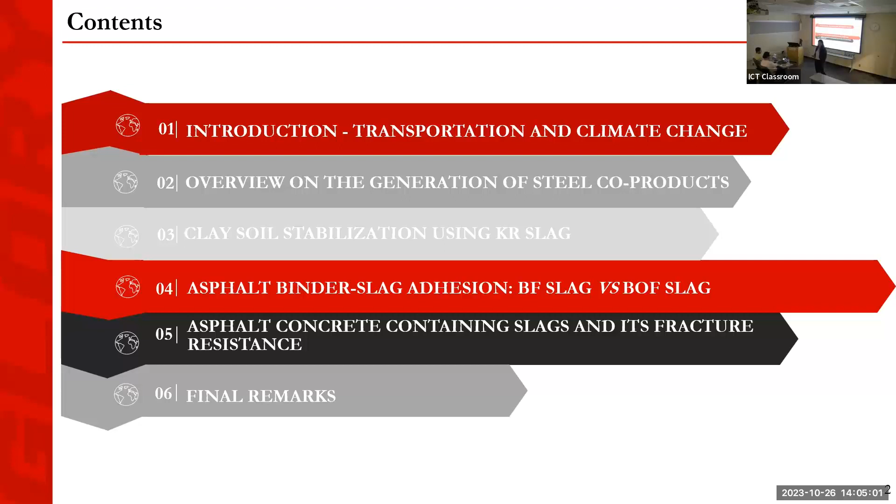And then the last case, I do work with numerical modeling, so I had to show a little bit of modeling and how I use it to try to infer if I use slag, how does it change the cracking evolution, initiation and evolution, and final fracture of an asphalt concrete, and final remarks.

So just to start, transportation and climate change. Probably you already heard in many presentations that there is a concern in many seminars, webinars, that we are talking about climate change. And there are many effects, and especially on transportation systems, we are seeing the effects of climate change with extreme events such as floods, droughts, hurricanes, wildfire.

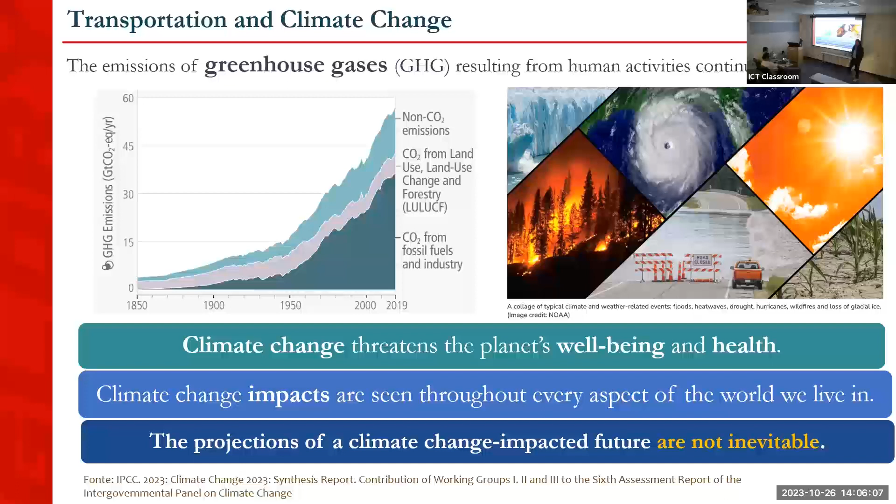And the cause, it's because we are increasing the amount of CO2 emissions, the way we are using the materials, and we are building infrastructure, we may be harming the planet. So the planet's well-being and health are threatened. So we need to find ways to minimize the impacts of our activities. So the projection of a climate change impact future is not inevitable. What I'm saying is that we can do something right now so that we have a better future for our planet at the end.

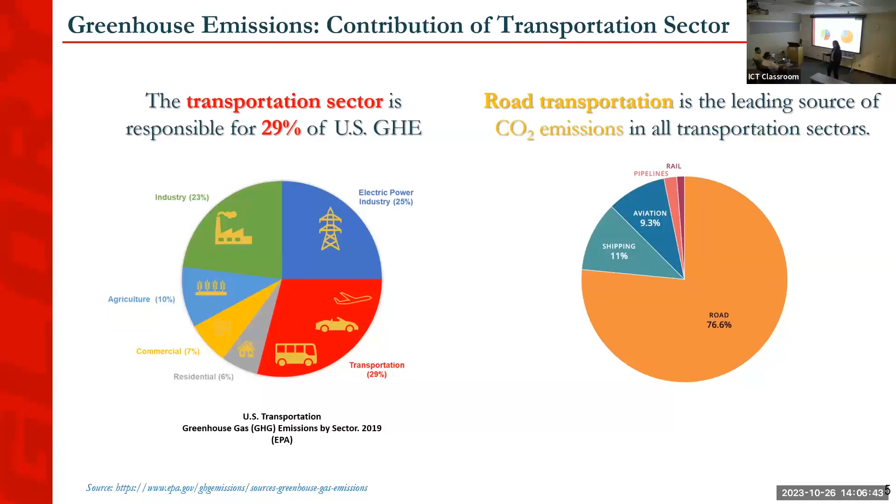So talking about the main contributions for CO2 emission, the transportation sector is responsible for 29% of the US greenhouse emissions, as you can see on this graph from EPA. And when we talk about transportation, we have contributions from aviation, shipping, pipelines, but most of the contributions come from roadway transportation, okay? And part of these impacts comes from the production of materials and roadway building and maintenance activities. So just for material production and transportation, road construction and maintenance, we can account for 5 to 25% of the total carbon emissions from transportation.

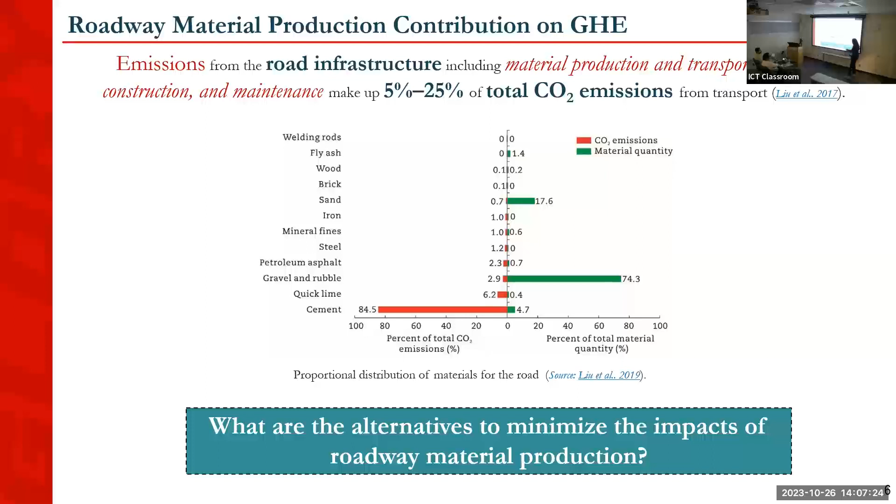So we need to find a way to try to reduce that number. That is our contribution as people that work with infrastructure materials. Maybe not as big as other contributions for other sectors, but we still have to make our contribution to try to reduce the CO2 emissions. Okay, so what are the alternatives to minimize the impacts of roadway material production?

So there are many ways that we can think as engineers, as materials engineers, to contribute to less CO2. One way, the way that I like and love to research, is by recycling and reusing materials that we already have available. So why extract new materials if there are local materials we can use? This helps minimize the extraction of natural resources. Second, using local material, we reduce the transport distance of the material, so less fuel consumption.

This also contributes to the reduction of CO2. Again, we get local materials that are locally available. We can mix, but it's not going to help if the interaction of this material is not good with conventional pavement materials. So we've got to also try to find ways to design and optimize the use of those materials so we can have durable mixtures, or pavement base layer materials, at the end. This all helps pavement sustainability.

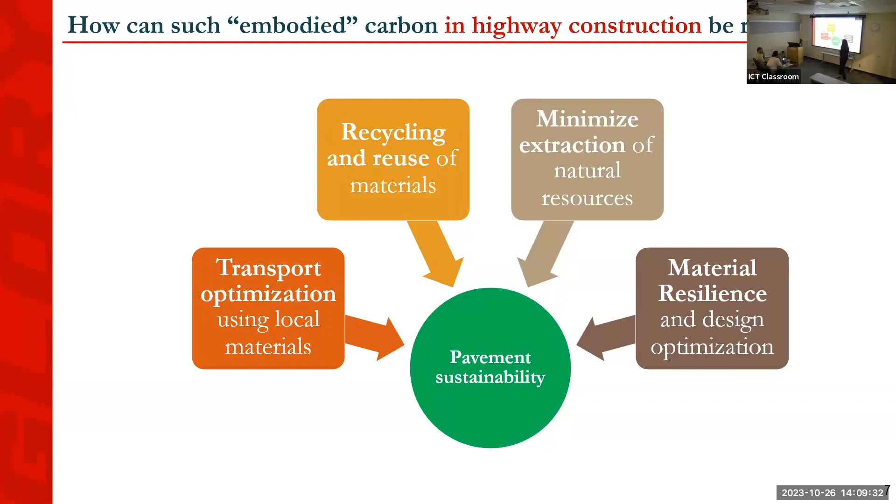And that's where slag comes into play. When I think about slag, if I have a slag company, a slag supplier close to my construction, I can recycle and reuse that material. I can reduce and optimize the transport of materials. I can use slag in place of natural aggregates, and minimize the extraction of natural resources. And because of some of the slag properties, I can enhance the performance of my mixture or soil. So I can see slag participating in a positive way in many of those things that can contribute to pavement sustainability. So let's go to slag then.

So what is slag? Slag comes from steel, and steel is one of the most used materials in the world, the second most widely utilized material globally. Global production of steel is 1.8 billion tons - it's a lot of material out there. In the US, 85 million tons are produced every year. So we're talking about steel.

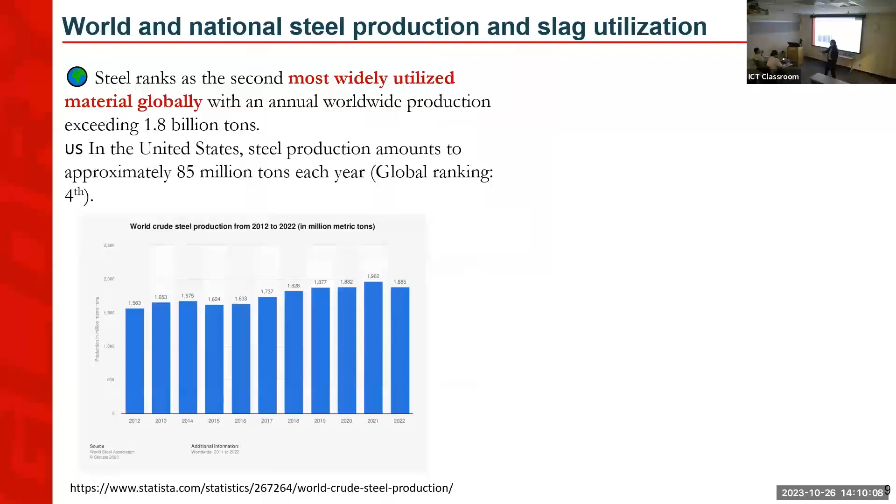But during the production of steel, we have the generation of this co-product. This seems like an aggregate pile, doesn't it? This is a recent photo that I took in Nebraska at a slag supplier. This material, when it comes from steel production, comes very hot, and then when it cools down, becomes like an aggregate. This is a great material, and I'm going to show you some of its properties.

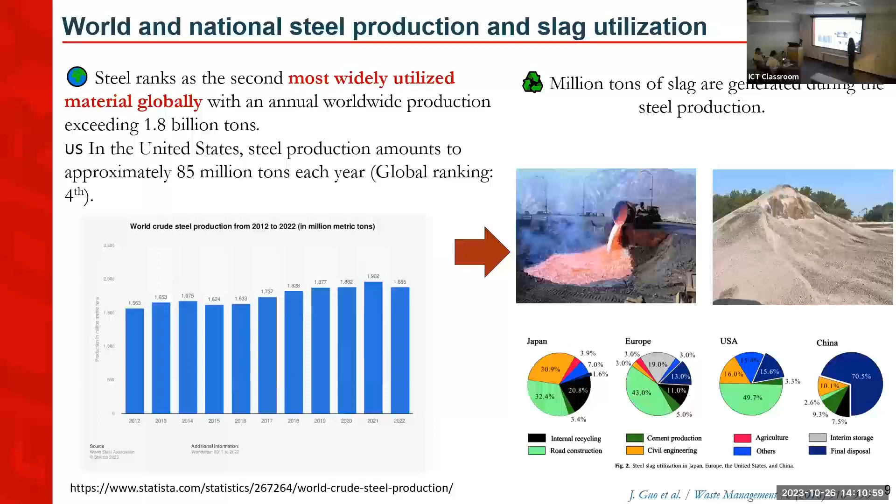And in fact, it has been used in many countries and continents. In the US, roadways use 49%, but you still have 15 to 16% that are just disposed of in landfills. Even in roadway construction it's used, but maybe we can have a better use on roadways. They are used, but just for local roadways or paving rural areas, but maybe we can use it for novel structures.

So what are these slags? You know slag comes from steel, it's a co-product. Let me show you that there are different types of slags. But before talking about slags, let me show you how steel is produced so you can understand where slag comes from. To produce steel, we need raw materials such as iron ore, limestone, and coal.

Those materials go to pre-processing, and then they come into this first furnace that is called a blast furnace. This is to transform the raw material into molten iron - this is the first thing we do to get to steel. We produce molten iron. Then, depending on the industry, they want to remove excess sulfur from the molten iron because this improves the quality of steel.

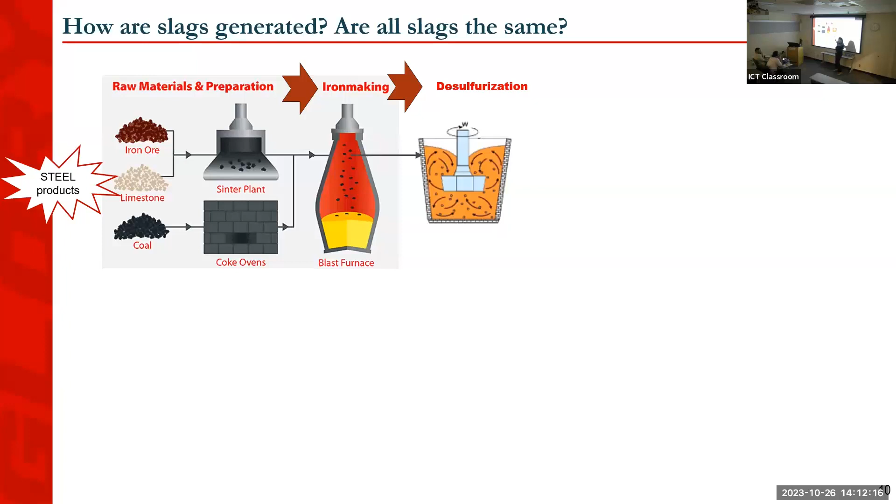So the molten iron goes to a desulfurization process, and this furnace is called a Kanbara reactor. So we remove excess sulfur from molten iron. Then the molten iron goes to another furnace - it can be a basic oxygen furnace, or an electric arc furnace, depending on the steel company - to transform molten iron into steel. Then steel goes through final refining and cutting, and we have the final products. So let's see now, slags.

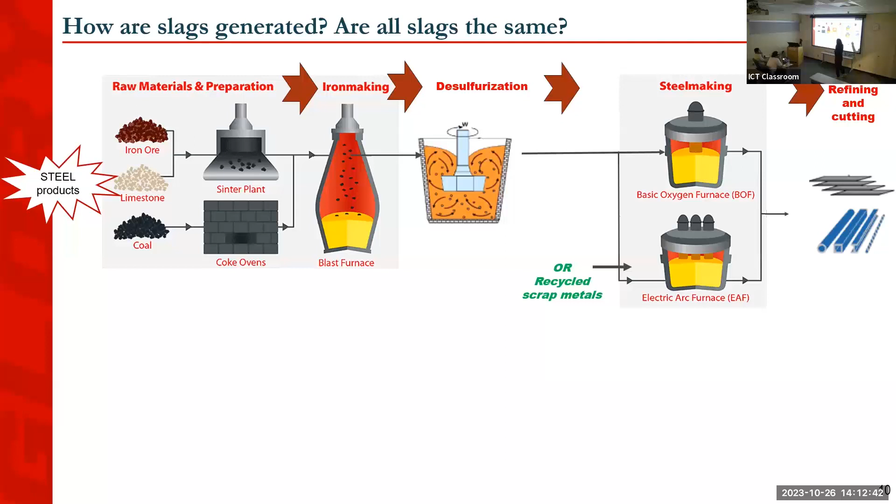So in each of these processes, we have different slags being generated. From the blast furnace, we have the first type of slag, called blast furnace slag, or sometimes iron slag, because it's generated during the production of molten iron. About 200 to 300 kilograms per ton of molten iron are generated. From the Kanbara reactor process, we have about 120 kilograms per ton of steel of this slag being generated. From the basic oxygen furnace, we have BOF slag, and from the electric arc furnace, we have EAF slag. It's really important to understand that in each part of the steelmaking process, we have different slags.

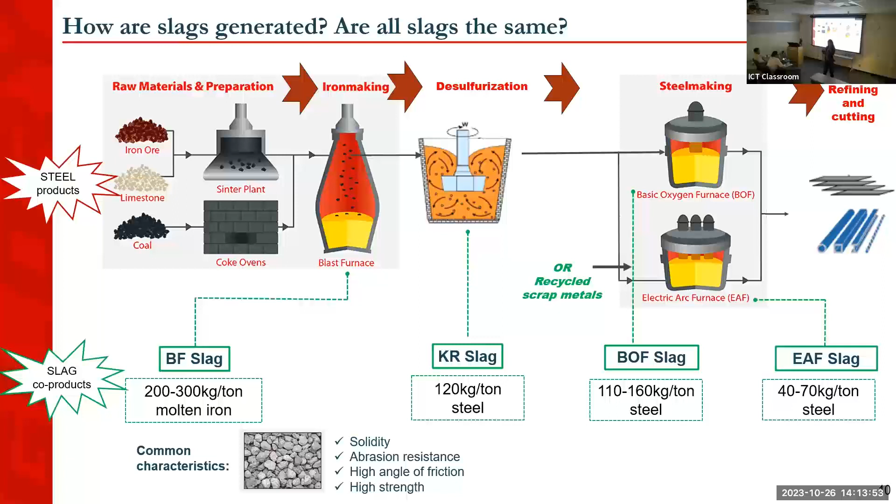Before, when people were not using slag as a pavement material, everything was blended together, very heterogeneous. So it's really important to separate the materials, like plastic. We've got to separate LDPE, HDPE, polypropylene, so we can have a better idea of the material characteristics, so we can better blend and optimize the materials.

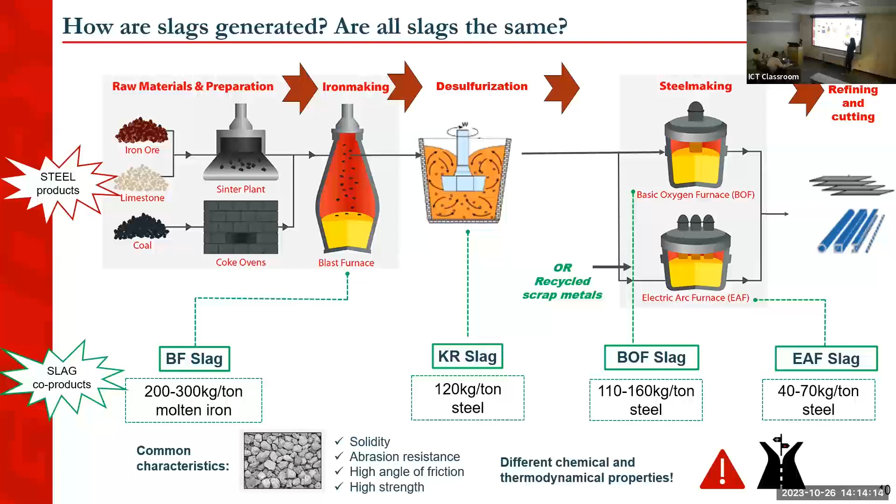Same thing for slags. We saw that there were different types of slags, and all of them possess good solidity, good abrasion resistance, high angle of friction, high strength. However, they differ in terms of chemical and thermodynamic characteristics.

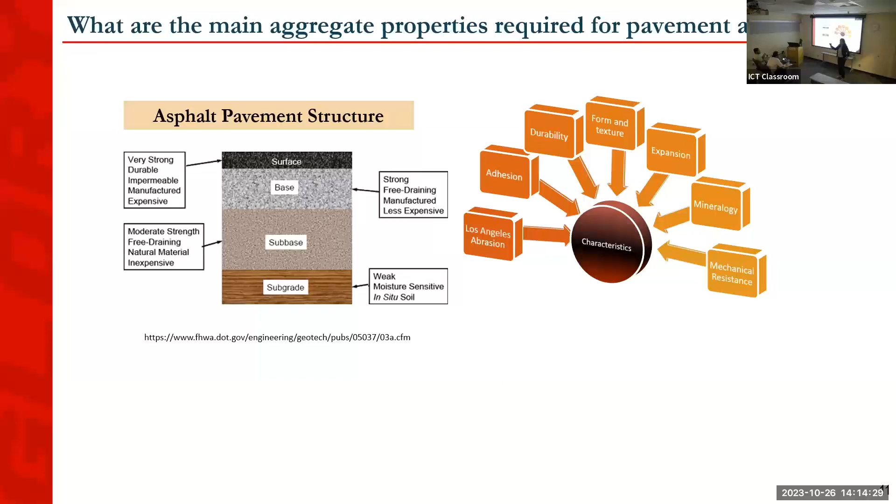The slides are passing automatically. I don't know why, but that's okay. I'll keep the pace as they're passing. So, is it good or too fast? It's good, can I continue at this pace?

So you understand different types of slags have more or less the same mechanical properties, but different chemical characteristics. And this affects the way the slags interact with pavement materials.

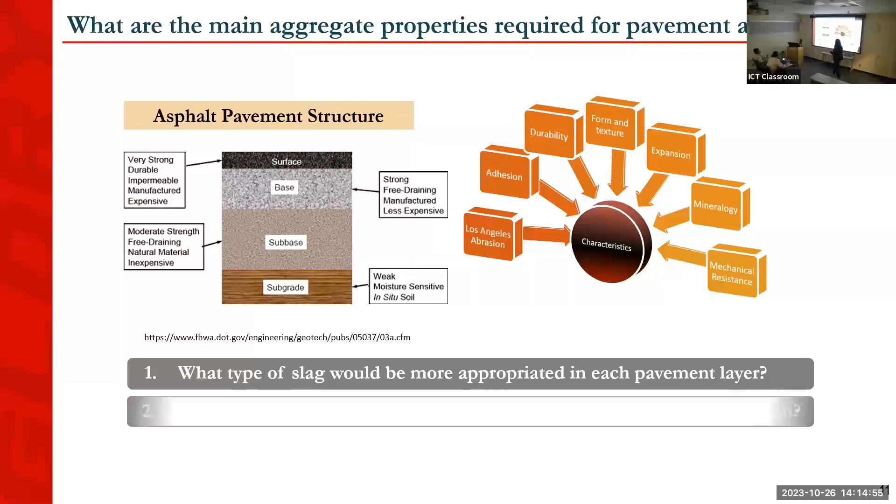So for asphalt pavement, if I want to use this material, first I need to identify what type of slag, because I showed you 4 types, and what type is better or appropriate in each layer, because each layer has its own property requirements and control parameters. So I need to identify this.

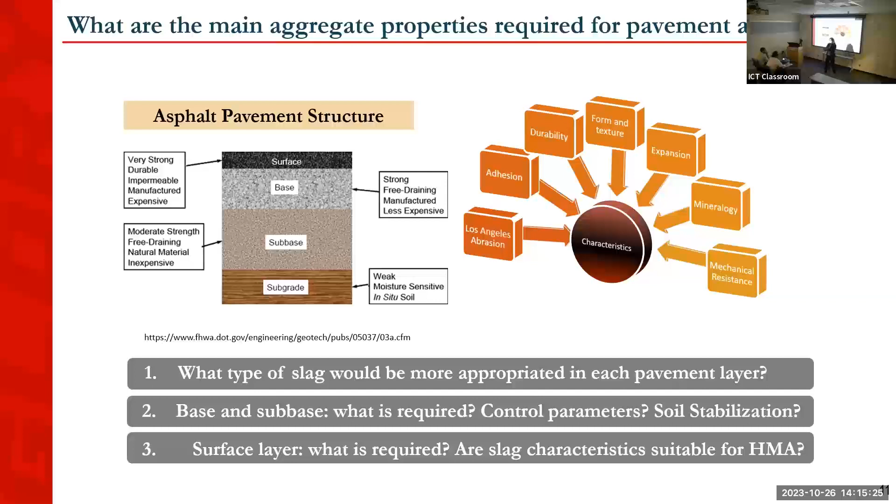If I want to use it in base or sub-base, what are the control parameters? Can I use it for soil stabilization? If I want to use it for the surface layer, how is this slag going to interact with asphalt binder, or other aggregates, or the interlock—is it good or not? So depending on the layer, we need to identify the use so we can select the better type for each layer.

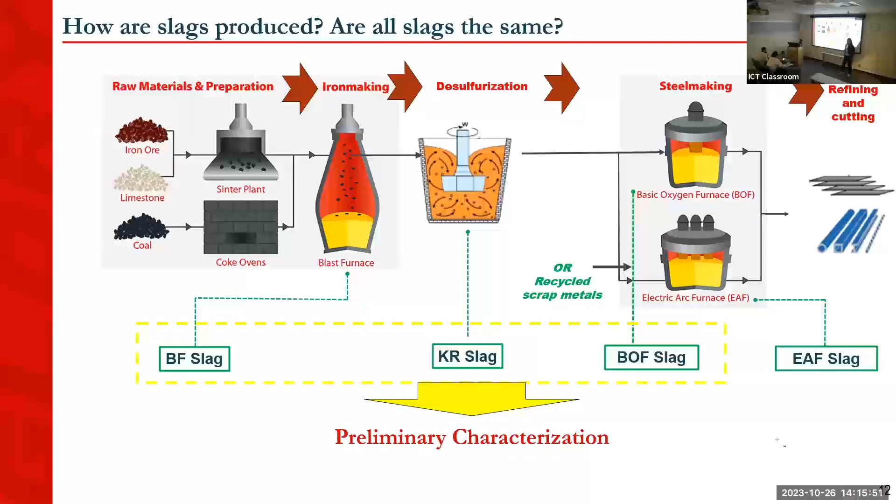To do that, we selected those 3 slags that were available in Brazil when I started working with slags, and we did a preliminary characterization—a very simple characterization, the common aggregate properties that state DOTs do. So we checked bulk specific gravity, absorption, Los Angeles abrasion, sodium sulfate soundness, adhesion, and the expansion of these slags.

What we noticed was that BOF, basic oxygen furnace slag, passed the requirements for aggregates to be used to produce asphalt concrete. So we said, well, BOF can be a candidate for HMA application.

The BF slag, we saw from a simple boiling test that there wasn't good adhesion of the BF slag with the binder. So it did not pass, and it also had higher absorption. This could be a flag that, if I decide to use BF, I need to add some additive to improve the bonding between this slag and the binder. I also have to be careful with the amount of binder needed because of the higher absorption of this material—it might increase costs, and we can lose durability if the asphalt film thickness isn't enough.

And KR, we observed the same thing in terms of absorption. When we started this research with KR in Brazil, one of the concerns from the company was with the KR slag—they had huge piles with no use, and they were going to landfills. So we started to focus on the KR slag when we began research on slag use.

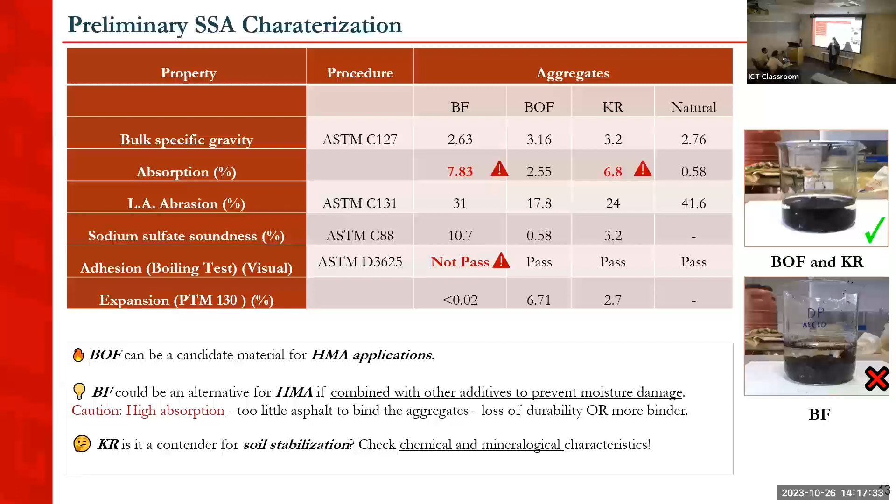So we went a little deeper on the KR and did a size distribution analysis. We saw that this material is well graded. Maybe it can act like a rock, and we can stabilize soils by mixing soil with aggregates—mechanical stabilization.

But we also noticed from chemical analysis—X-ray fluorescence analysis, elemental composition—the presence of silica, calcium, and iron, which are also common in cementitious materials such as Portland cement. And from X-ray diffractogram, we saw the presence of Portlandite, quartz, calcite, and ettringite. This gave us insight that this slag not only can be good for mechanical stabilization, but might give us some chemical stabilization because of those chemical components.

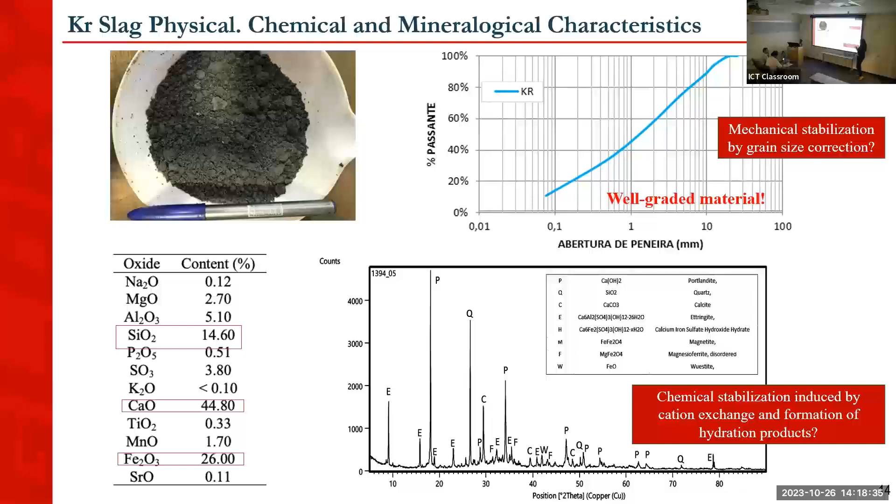So chemical stabilization induced by cation exchange and the formation of hydration products—those were our initial thoughts. So we decided to move forward with this study on the use of clay soil stabilized with KR slag.

In this project, two students worked on it. The hypothesis was: can we use KR slag for chemical and mechanical stabilization? We had some reasons—if this works, this can be a very sustainable material.

We are minimizing natural aggregate extraction. We don't need to blend with natural aggregates. And if this slag can be used in place of hydrated lime or Portland cement, we automatically reduce the use of materials that contribute a lot to CO2 emissions. So we are reducing CO2 emissions.

More than that, cement and hydrated lime are not cheap materials. If we can use slag that at that time had no cost, we had economical reasons too. Besides that, this slag does not expand, which is one of the concerns when we work with unbound materials—the expansion.

To evaluate that, we did some laboratory investigation and also built some field sections. I'm going to show just part of the results due to time limitations here.

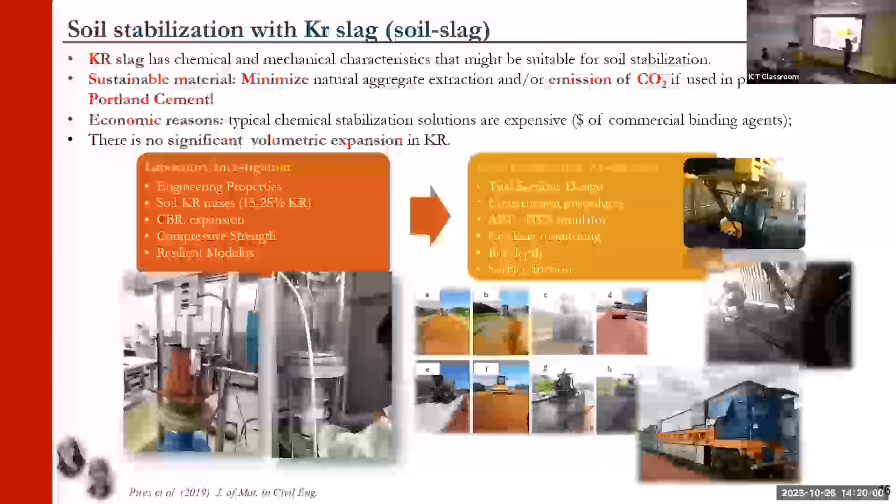First, one thing I want to point out: when we selected two soils, soil 1 was a poor clay soil that could not be used to build pavement layers, base or sub-base. It was an A-7-6 soil, CBR very low, resilient modulus very low, we couldn't use it.

But when we added slag, the first thing we noticed was the reduction of plasticity index. This reduction was observed for both types of soil. Soil 2 was more like a sandy soil, so we observed that the reduction in plasticity index was higher in the clay soil than in the sandy soil.

So one thing we started to hypothesize: there might be some cation exchange happening, and we are reducing the diffuse double layer present in clay soils. Clay minerals are interacting with cations from the KR slag, and that may be the reason we are seeing this reduction in plasticity index.

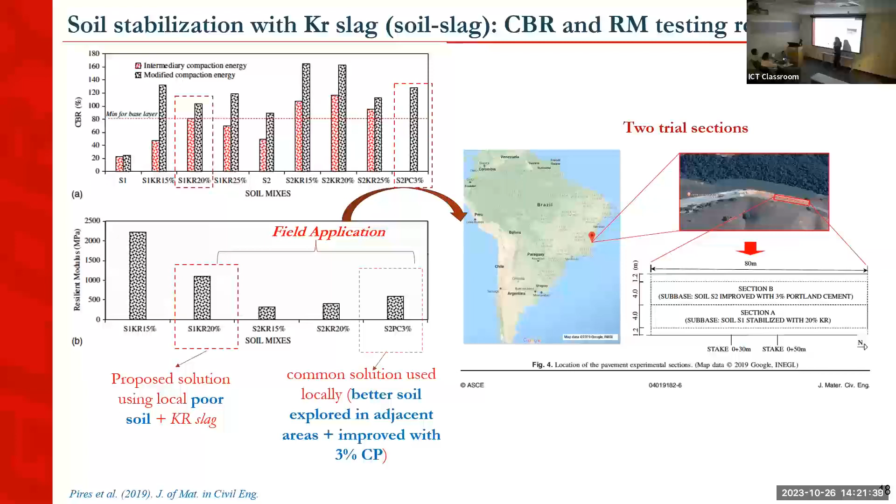We did some mechanical tests. I just put resilient modulus and CBR, and I highlighted two cases here: the poor soil with 20% slag, and the better quality soil mixed with 3% Portland cement. This was the common solution locally in the state where I did this research. They were using this for the sub-base layer. But our alternative was—instead of using a soil that isn't available close by, you have to go a bit farther to get this better quality soil and mix it with 3% cement—why don't we use this poor soil but mix it with slag, since we saw similar mechanical performance?

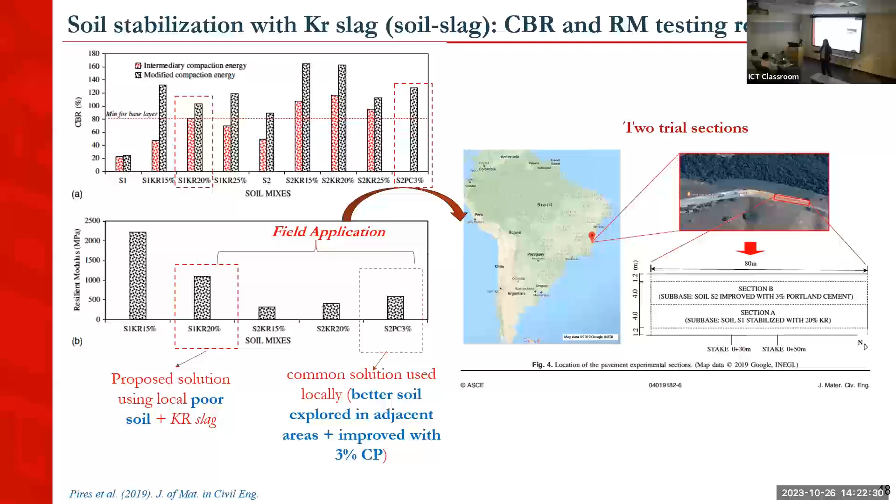So we selected those two soils and built field sections in Brazil, the state that I work in. We built two field sections, 80 meters long by 4 meters wide. Both field sections had the same asphalt layer and same base layer; the difference was the sub-base layer—one with better soil with 3% Portland cement, another with clay soil with 20% KR slag.

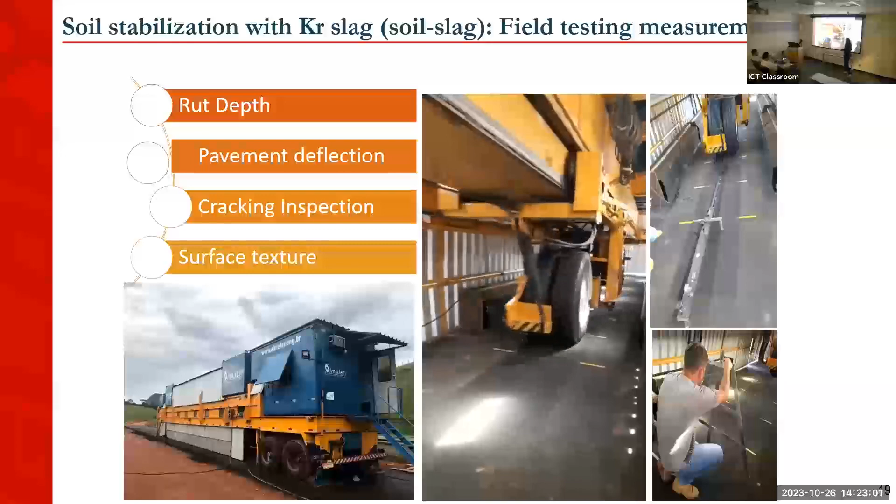We placed the sections—this looks like a truck, this is a heavy vehicle simulator. So we placed this heavy vehicle simulator on top of each section.

This heavy vehicle simulator was placed on top of each section for a 3-month period until 1 million passes of this wheel load were completed on the vehicle. We measured the deflection and the rut depth periodically, every 2 weeks.

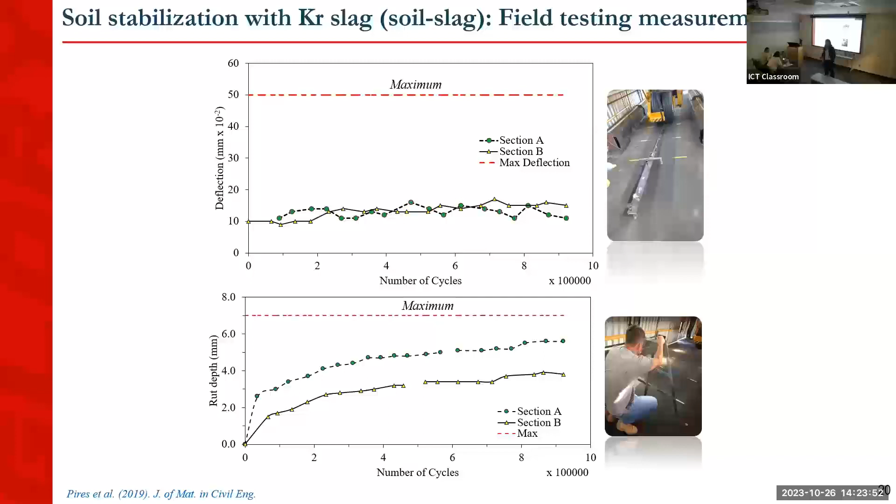We monitored both sections, and they performed very similarly—the deflections were very low, well below the maximum limit established by the concessionaire, and the rut depths were also under the maximum limit. This result made the concessionaire funding this research say, wow, maybe this is a good solution for us to apply and construct pavements with. So they started using the poor soil with slag to duplicate the highway.

But we wanted to go further and see what is happening—what is the KR doing with this clay soil that justifies this good result? So another student did some microscopic analysis, microstructure analysis, and chemical analysis. He quantified the cation exchange capacity of the KR and observed that the total cation exchange capacity was 47, similar to values found for common binding agents such as Portland cement or hydrated lime.

He also saw that the contribution of the Ca2+ cation was more predominant, and this cation can exchange more easily with clay minerals, giving the positive results of flocculation and agglomeration that we expect when we stabilize a soil with calcium-rich material.

Also, we took this soil sample and evaluated it under the microscope after 4 days and after 28 days. When mixed with KR, we observed the creation, the appearance of those fibrillar, needle-shaped structures. This is also observed when Portland cement undergoes its hydration reaction, and it can give extra strength to the material, making the microstructure more dense and increasing the strength.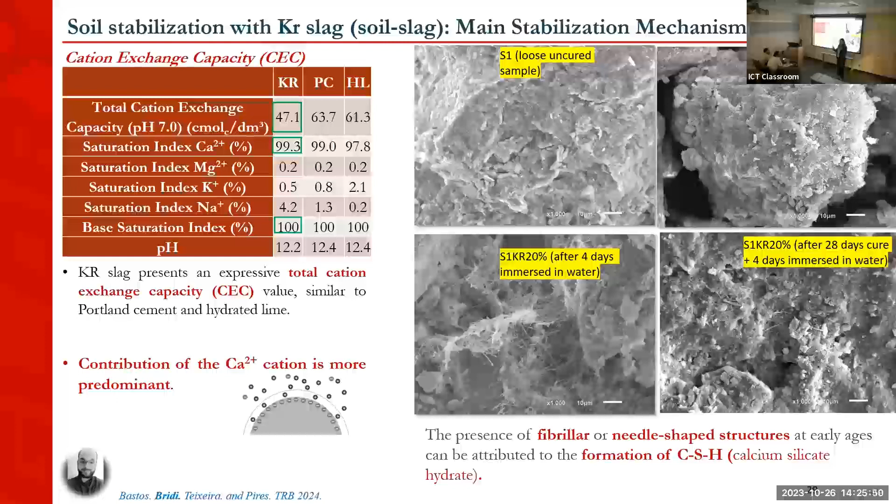So for us, this was evidence that slag was helping the clay soil through cation exchange, reducing the plasticity, creating agglomeration and flocculation, and also providing a strength gain due to the hydration of some of the chemical components.

In another study, I showed you two other types of slag, BF and BOF. BF showed very poor adhesion to the binder—you can see in this image, it's very clear. With the same amount of binder but a different type of slag, you can see good adhesion, right?

Very empirical test, but it gives us this initial insight. When we took those slags and used them to produce asphalt concrete in a moisture damage test, when I replaced natural aggregates by BF slag, the TSR value - I don't know if some of you are familiar with moisture damage test - was 54%, which is low.

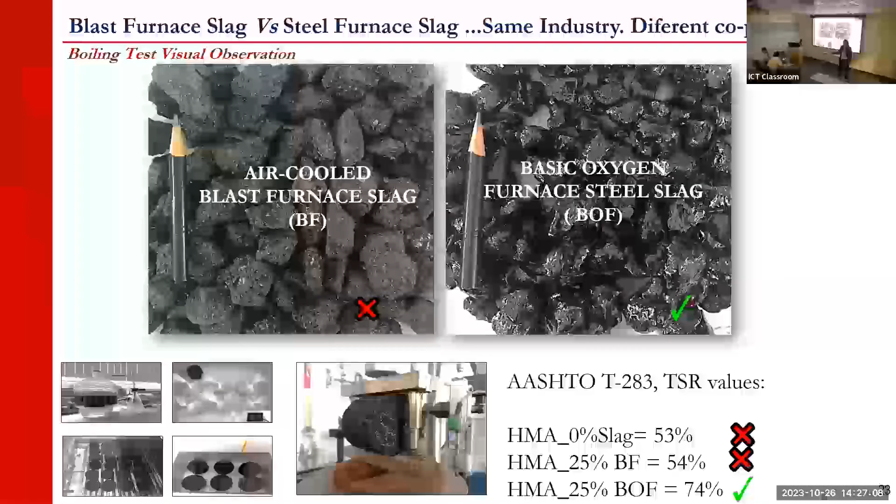We expect at least 70%. When we replace natural aggregates by BOF, the strength, the moisture damage resistance increased comparing with our reference mixture. This was expected because we knew this slag had a better adhesion. But you want to know why this slag is having a better adhesion than this one? They come from the same industry. What is happening? Check that.

We try to evaluate the binder aggregate adhesion through different perspectives. Binder and aggregates interact with each other, and the adhesion can happen because of physical interactions - physical adhesion - can be due to thermodynamic interactions - thermodynamic adhesion - or can be through chemical interactions - chemical adhesion. So all those things can contribute to a good binder aggregate adhesion. So talking about balanced mix design, I try to use the same concept, trying to balance chemical, thermodynamical, and physical properties of the slags to have a better adhesion.

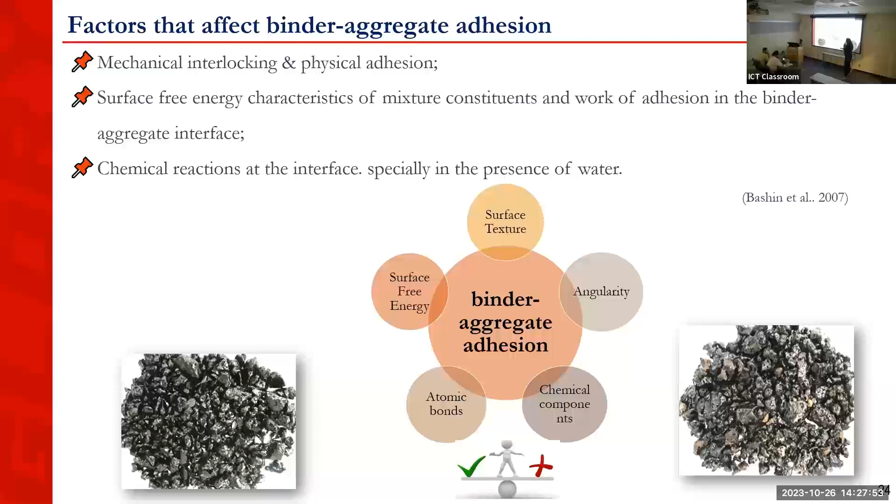To evaluate the binder aggregate adhesion, what we did was evaluate physical adhesion using AIMS and laser scanning microscopy. AIMS to check texture and angularity difference between those two slags, and laser scanning microscopy to check rugosity of the materials. Those things can contribute to physical adhesion.

For thermodynamics, we measured the surface free energy of those two slags to see if they were different. We also checked the wettability of the slag by the binder by measuring the contact angle. And we also used AFM to check the work of adhesion between the binder atoms and the slag atoms. And finally, we checked the chemical composition of those two slags by using X-ray fluorescence.

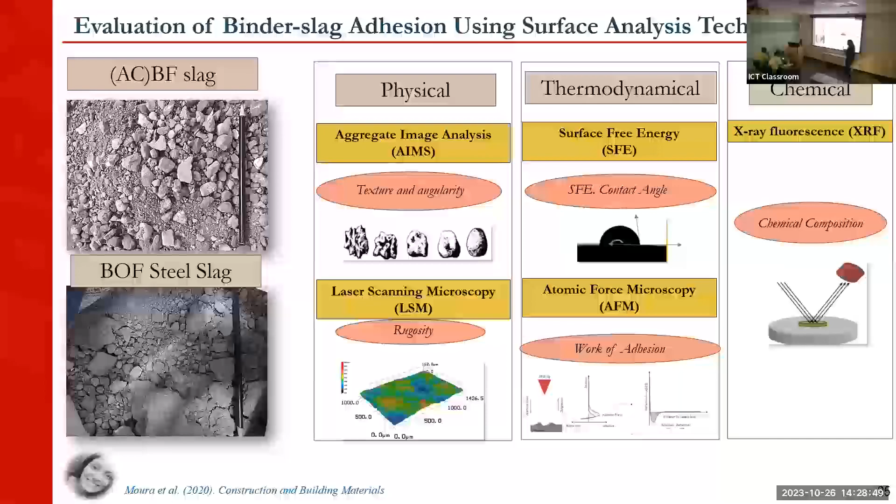The AIMS results I didn't plot here, but they were very similar, so the difference in angularity could not explain why one slag was adhering better with binder than the other. From the surface measurements, we saw that the BF slag has a higher roughness than BOF, which could result in better adhesion, but that was not what we observed. The values were not too high compared with the standard deviation, so we can say this is not the reason why one slag is performing better than the other.

Let's check surface free energy results. Total surface free energy - what I was expecting, me and my student, was that the BOF could have a much higher surface free energy, which could justify that BOF was better. But again, the values were similar, though still comparable with limestone aggregates, which are the ones that better adhere to the binder, as opposed to granite aggregates.

Talking about this contact angle, we saw that the BOF showed a little bit lower angle. We can relate that the lower the angle, the better the wettability, and the better the wettability, the better the adhesiveness. It was a little bit lower than BF, suggesting a better slag in terms of adhesion with BOF, but it's still not so different as to justify what we found.

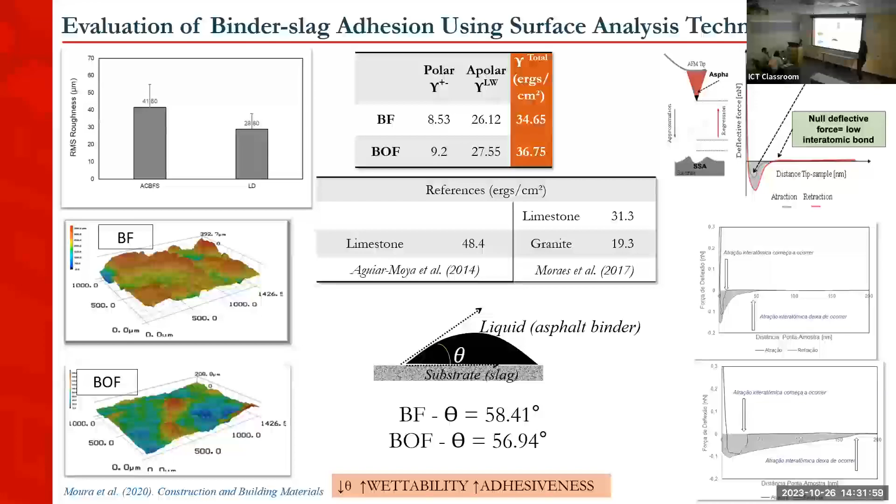Finally, we checked the chemical composition. ACBFS is the BF slag, and this is the BOF slag. We noticed that the BF slag had a much higher silica content and lower iron component content than the BOF slag, with more or less the same calcium oxide percentage. We know from the literature that silica aggregates are acid aggregates and don't have good adhesion with binder. This makes sense when we look at the BF slag's amount of silica.

Many literature sources suggest that the higher the iron content, the better the adhesion - it makes sense from our observations also. And calcium was the same, so this was not considered a variable. So the chemical evaluation helped us identify the potential reason why one slag worked better with binder than the other.

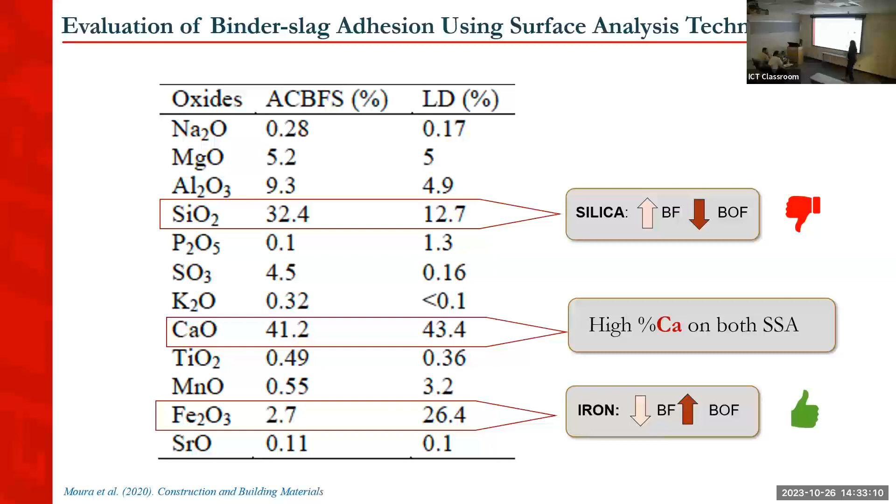But can I use blast furnace slag? It doesn't have good adhesion. Is there a way to improve it?

One way to improve is by adding additives, such as hydrated lime. Everybody knows to minimize moisture damage, you can add hydrated lime. So we added 2% hydrated lime to the original mixture where we replaced natural aggregates with 25% BF slag. When we added hydrated lime, the tensile strength ratio increased, which was the result we were expecting.

We also tried using a powder from the steel industry that was rich in iron, and this powder also seems to be a good alternative to improve moisture damage resistance. We also added BF slag to see if that could enhance results, and we saw a little bit of enhancement just by adding BF slag on the surface.

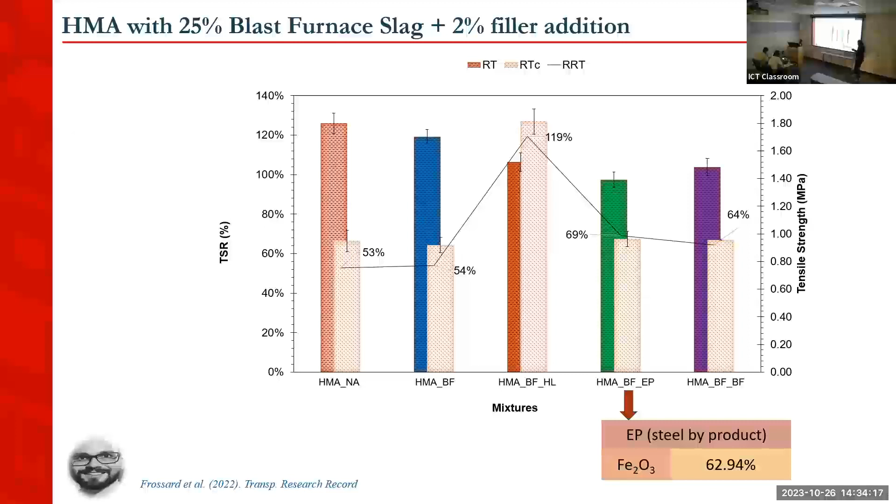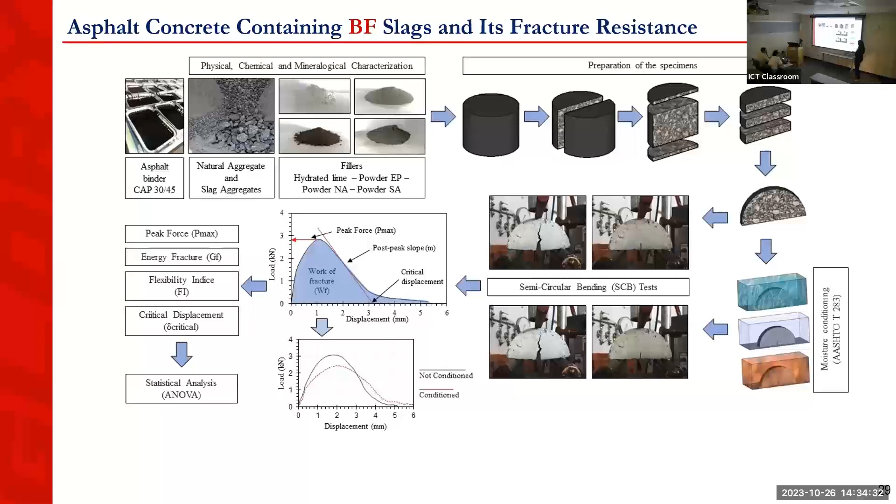This study also tried to evaluate the same powders and how they could affect the fracture resistance of the mixtures. So we did SCB tests before and after conditioning. What we observed was that when we evaluate the SCB test without subjecting it to moisture conditioning, all fillers behave kind of the same, so we didn't see the effect of filler chemistry improving fracture resistance.

But when we subjected the mixtures to moisture damage, we started to see interactions between the chemical components of the filler with the aggregates and binder, and the materials behaved totally differently. If we just look at the maximum force, they have almost the same ranking order as the TSR values.

But when we look into the fracture energy and the flexibility index, you can really see a difference depending on the filler you add and its chemical composition. By inducing moisture damage, you can really differentiate the contribution of each filler to adhesion resistance and, as a consequence, resistance to fracture.

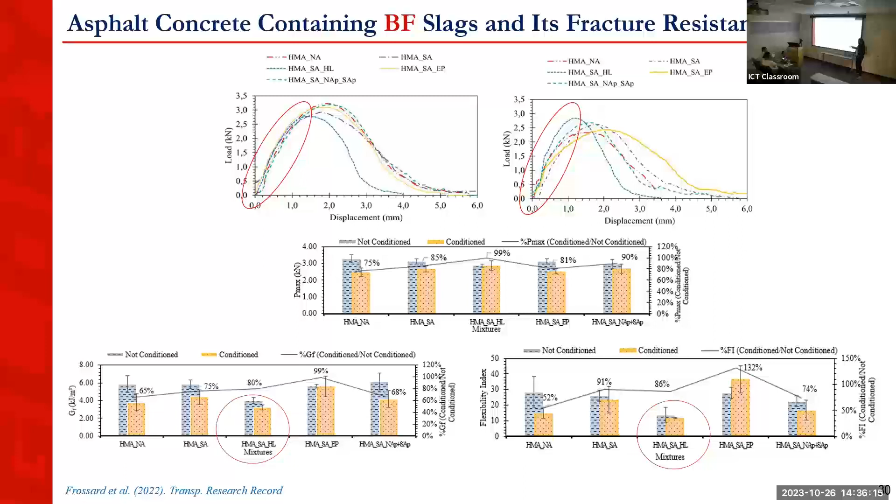Hydrated lime has the lowest flexibility index, which we attribute to the fact that hydrated lime enhances rigidity, making the mixture stiffer, so cracks propagate faster when we use hydrated lime. The EP powder didn't increase stiffness too much, but it still improved adhesion, and in that way it improved the flexibility index.

Finally, in this last study, we tried to evaluate what happens if slag is used as a filler in a conventional asphalt mixture.

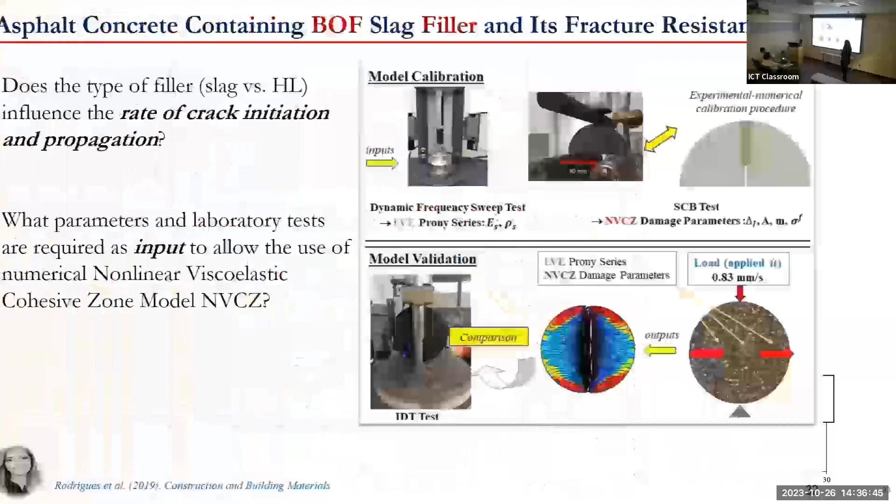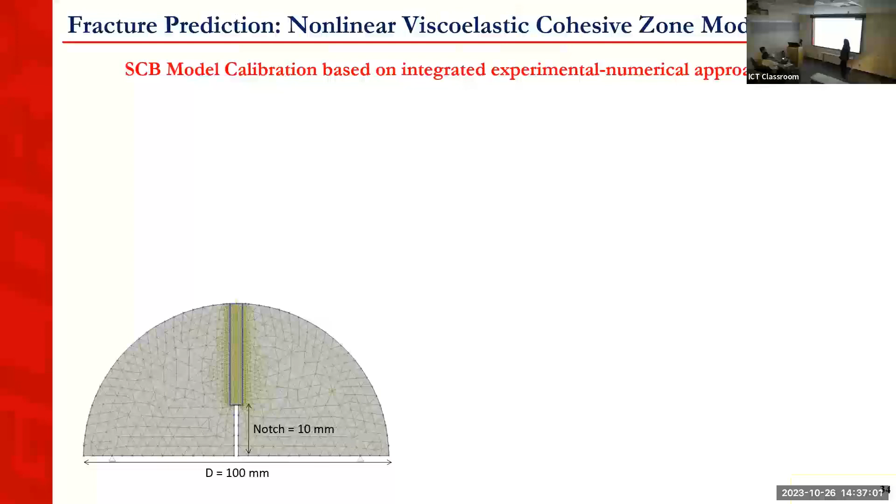All right, so we took two samples... it's going fast, stay there. I don't know why it's going really fast. Pushing her. See? Well, can we just remove this? Because I need to stop and explain. Something on the keyboard, maybe press something. Is there something on the keyboard?

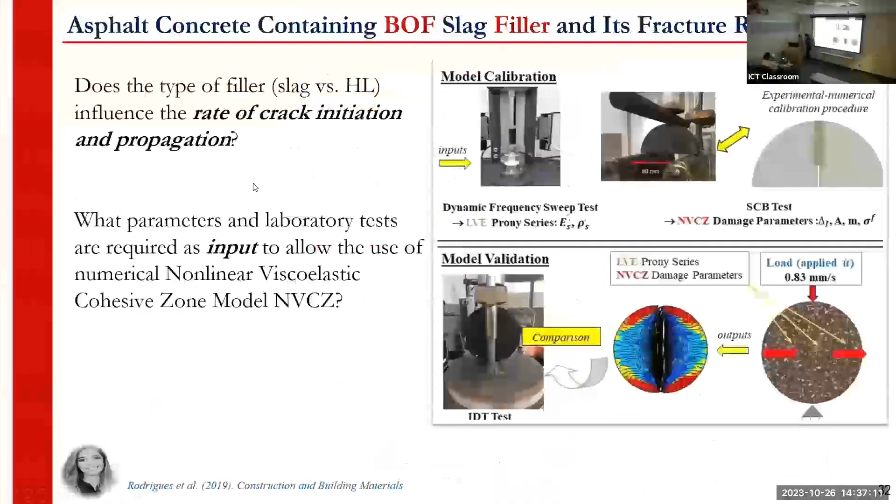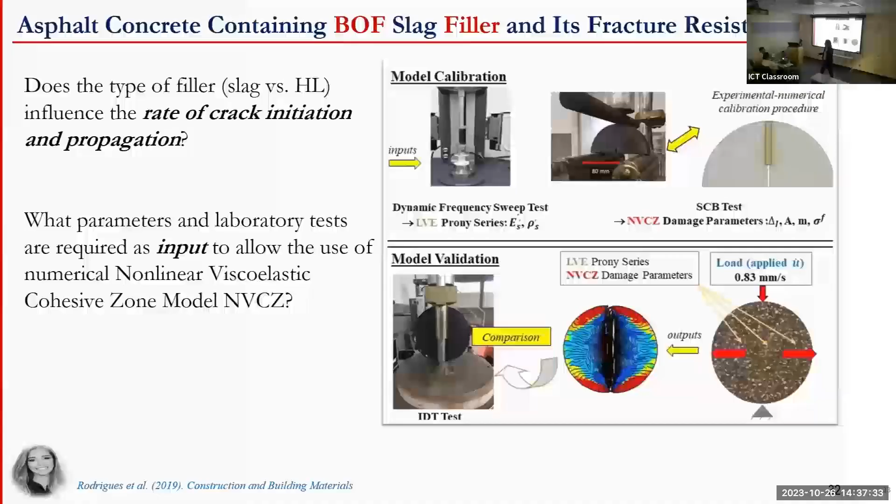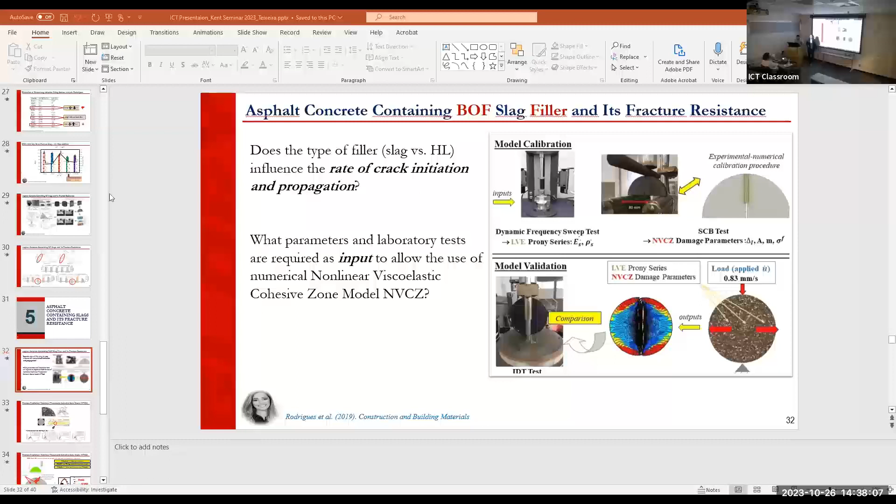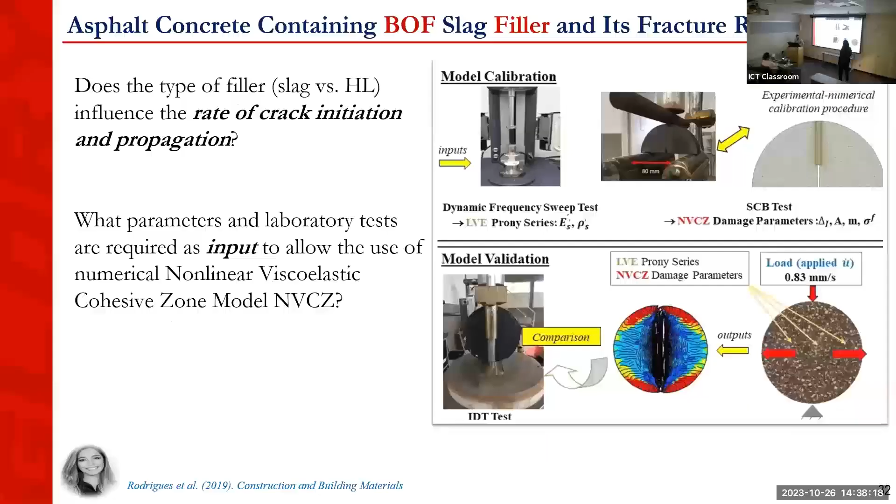Oh yeah, or just the numerical model and then crack propagation, right? Let's see. Leave it. Just leave it, maybe down. Yeah, like that. We found it, in this presentation mode.

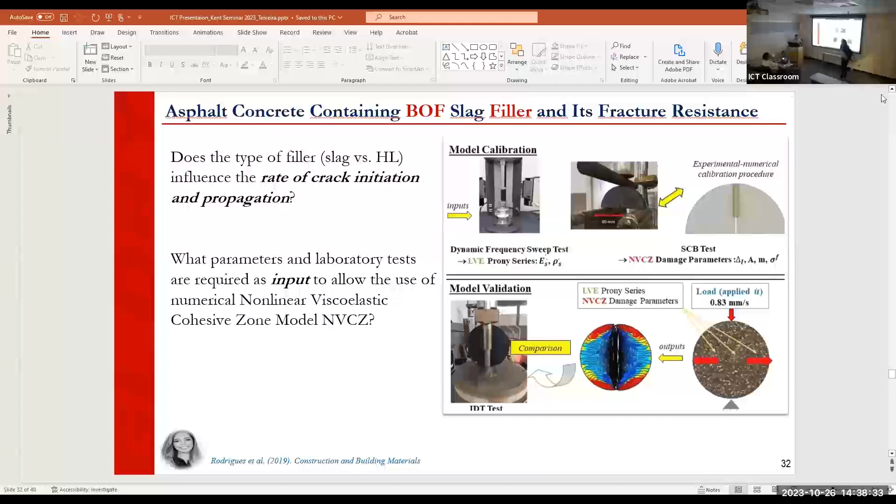Okay, so in this study we tried to use numerical modeling to infer how the addition of slag changed some fracture parameters, and each fracture parameter can be associated with how fast the damage propagates and when the crack is initiated. So there are many insights we can get.

So this student took two samples; the only difference was the type of filler, one slag, one hydrated lime. She did frequency sweep tests where we could get master curves from dynamic modulus as a function of frequency. We converted that to the time domain and obtained the Prony series, which was important for the modeling.

Then we also did SCB tests to get fracture parameters through a calibration process. Once we had the Prony series, linear viscoelastic properties, and fracture parameters from the model, we could simulate another test used as an IDT test for validation. So let's see what difference we got.

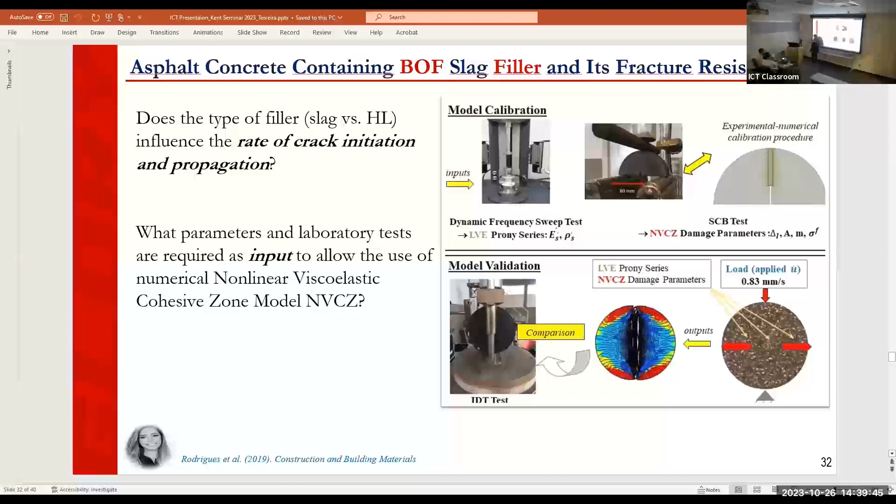Before showing the result, let me just talk briefly about the numerical model that we use. We use a micromechanical model based on fracture mechanics, where we can evaluate crack initiation and propagation explicitly. It's not an indirect way, it's a direct way to see when a crack starts and when it starts to propagate.

For that, we use what we call cohesive zone models, and there are many published in the literature. We used the nonlinear viscoelastic cohesive zone model in this study, defined by this equation. We have a convolution integral embedded in the model, that's why it's viscoelastic. It's nonlinear because if you look at the relationship between traction and displacement, you get a nonlinear curve.

We have several parameters, but one of them is this alpha function. Alpha is an internal state variable that counts how the crack propagates, and how fast. In this study, we use a phenomenological damage law where alpha's derivative in time can be defined by this power law, so we have A and M as damage parameters.

In this study, as shown later in the paper, each of the model parameters affects the force-displacement curve response of the material. The higher the delta, the more ductile the material seems to become. As we increase it, we reduce the maximum peak load and the fracture energy increases.

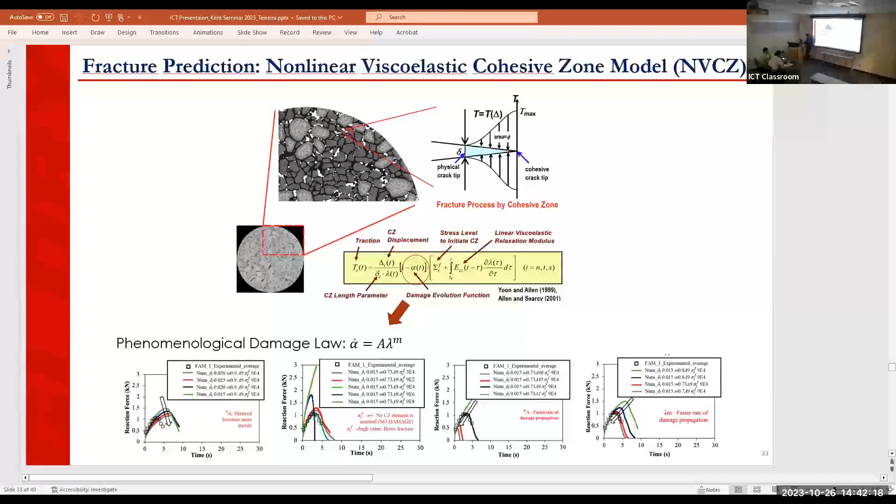When we did the calibration, we created a finite element mesh mimicking exactly the same dimensions as the sample used in the lab. Then we played with those parameters - A, M, sigma F, and delta - until the results we obtained in the experiment matched the simulation. This is what we call calibration, okay? It's not a prediction, it's just calibration. We try to match the curves.

And we can get nice videos like this. We observe as the sample is loaded, we have compressive stress on top, and tensile stress developing at the crack tip, until at a certain stress level it's too high and the crack starts to propagate. The tensile stress keeps getting higher until the sample can't sustain it anymore, and the crack starts to propagate. We did this calibration for the two samples.

From the difference in parameters, we got three things. Sigma F was higher for the mixture with hydrated lime, and the higher sigma F relates to a more brittle material. This makes sense to us from the SCB test, where hydrated lime presented more brittle fracture behavior, with a very steep post-peak decay curve.

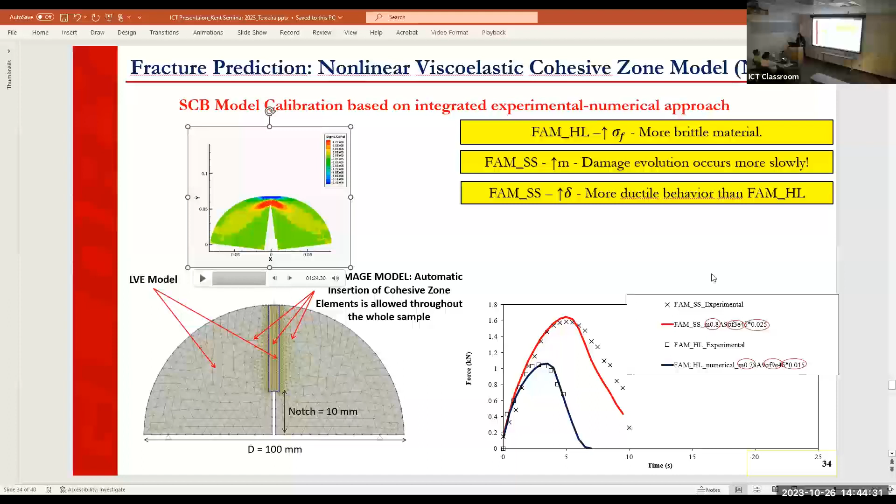Now, using those same parameters, we simulated the IDT test using parameters from the SCB and frequency sweep tests. We got a good prediction - now we can call this a prediction because we didn't calibrate, we used parameters from SCB and from the frequency sweep test, and got a good correlation on the curves. The initial slope was an indicator for us that the linear viscoelastic properties were satisfactorily obtained.

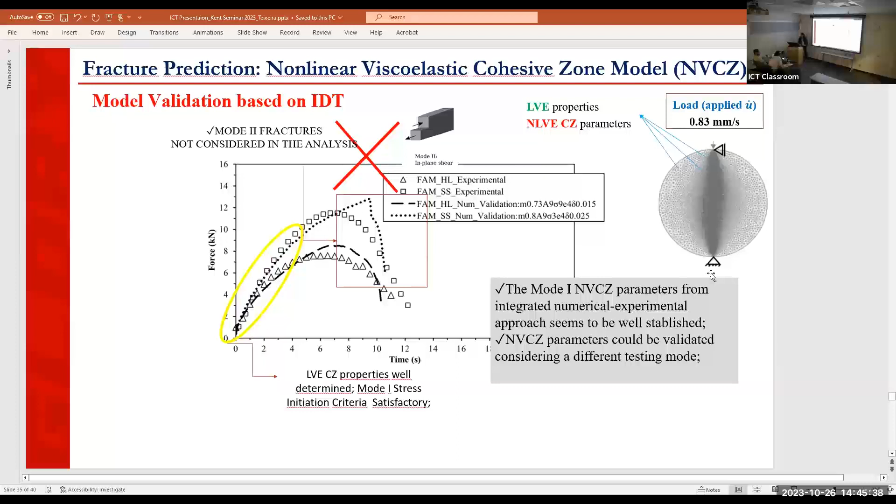We didn't get a good match after the peak, and for us that could indicate that in IDT, mixed mode cracking is developed, not only mode 1. In this simulation, we didn't consider mode 2 cracks, which could explain the mismatch on the post-peak curve. Still, it was a good correlation for us, and the model was able to predict the material's cracking response.

This is the mixture with hydrated lime.

Let me show you the final results. So the same graphic that I showed you, we can go back to the contour plots and analyze how the cohesive zones are being inserted and how the damage is propagating until we have the final sample failure.

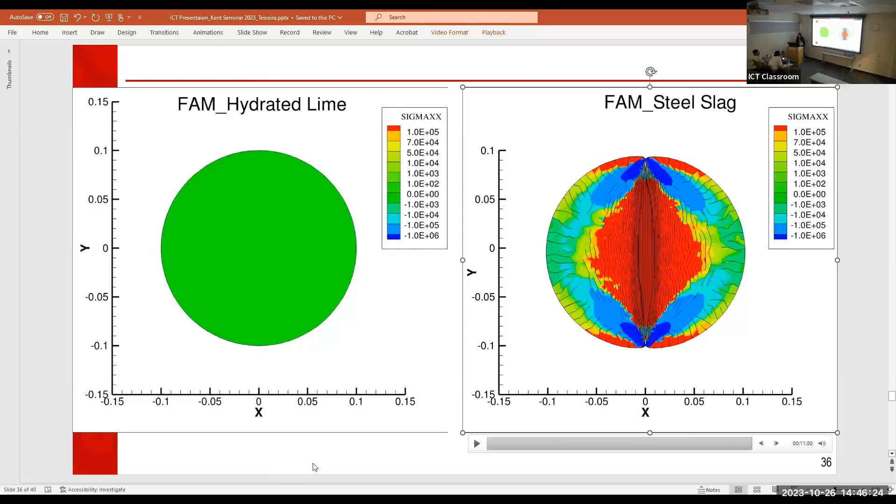And final remarks now. You saw here, so some results confirms that slag can be an option. It's important to identify which type of slag you are working with to identify the better use. It's important to understand physical, chemical, and mineralogical characteristics of each slag, so you can better define the appropriate use.

KR slag was a very nice, promised alternative for soil stabilization due to cation exchange capacity and also some hydration products that were observed. BOF and BF could be alternative for asphalt. We observed a better bonding of BOF slag with binder, which could be attributed to the presence of ferrous components and calcium oxide, and also because of its thermodynamical properties.

But BF is still viable if we add some additional modifiers. Finally, most of this work was done in Brazil, as I said, but the slag research is going to continue in Nebraska. We already identified a slag supplier that we're going to work with.

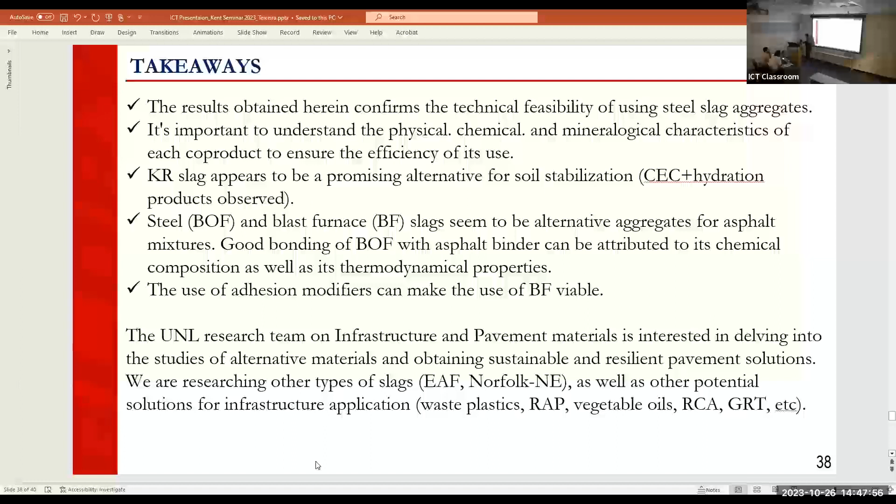And not only slag, we are interested to research different types of alternative materials to contribute to pavement sustainability, such as waste plastics, RAP, vegetable oils, recycled concrete aggregates. Those are all alternatives that we are currently researching.

You should clean the lab. Yes, okay, it's really important.